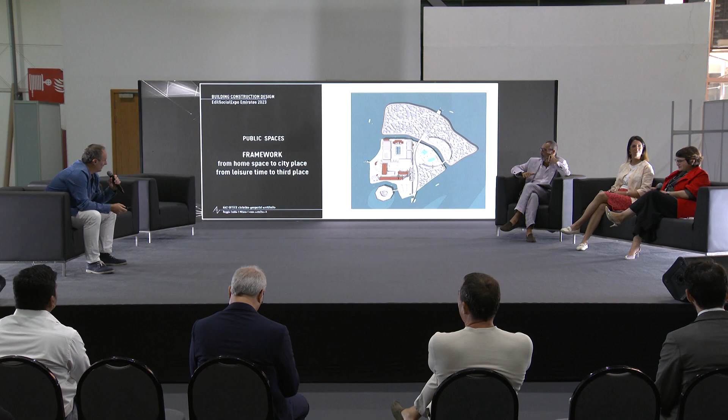I did this contribution in relation to the roundtable related to public space. That is a way in which we are trying to work for many years on public spaces, but even on the home space, as you can see in the title.

Because I think that the time in which we are is really different from the past, and so we have to try, as architects, to define spaces that are related to the time in which we are living. And so if we think about contemporary architecture, what I think is real architecture, we have to imagine built spaces that correspond to existing spaces and their inhabitants. And so we have to imagine the space, as we said yesterday, as a generator of well-being.

In this way, it's obvious that we have to refer to the concept of density, efficiency, and flexibility, because we have to build a sort of framework that can link the spatial to the experiential aspect by using a principle of organization that can be for work, but even for living spaces.

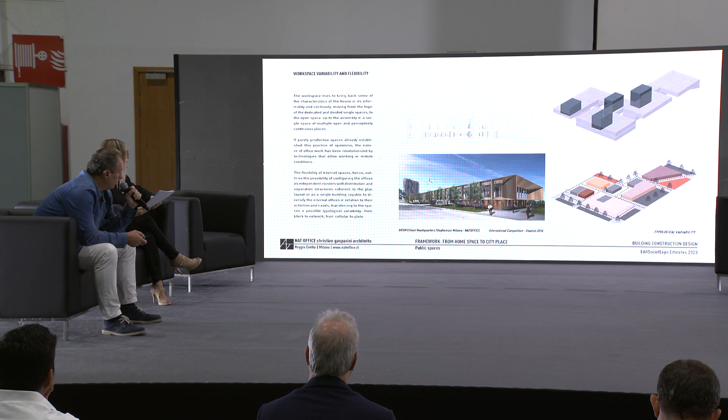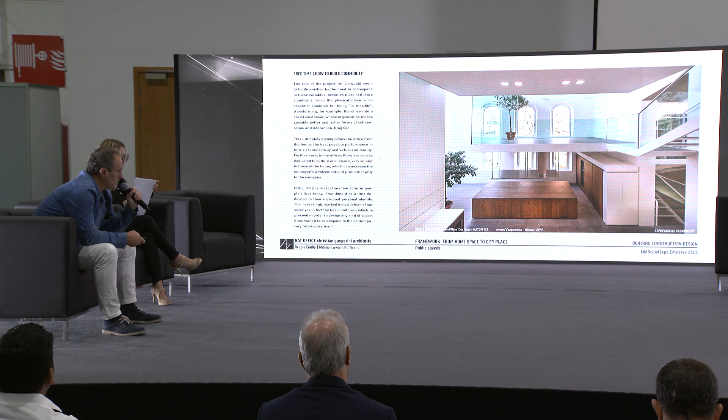This is a project that is interesting for me because we realized it in an old ancient building, and it was awarded best intervention in heritage in Italy in 2018. It's a project in which the client asked us to imagine these spaces for a headquarters that has to become even a home. So we have to imagine that these spaces have to be a home and an office at the same time, only by changing the furniture, only by changing the activity that we put inside these spaces.

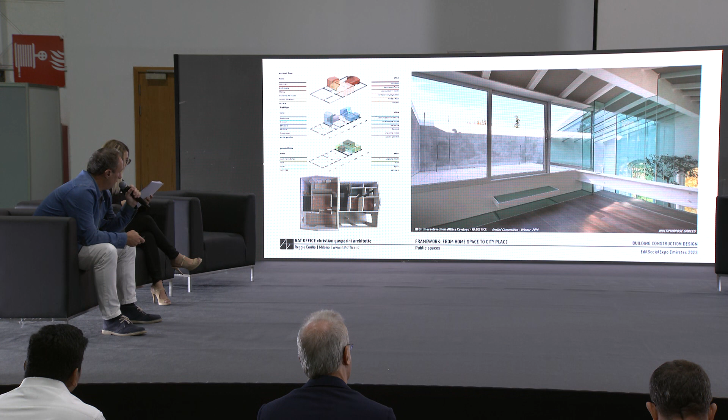For this reason, if architecture wants to be the engine of man's evolution, it has to turn its procedural and compositional gaze to the concept of time. This is really important because our contemporary virtual and technological world has made time syncopated for me—an instantaneous, shortened time which structures fragments and not sequences.

If we imagine when we are here, even while we are here in a physical place, at the same time we have the phone, and we may stay in this same moment connected through the phone with another place in the world or with another friend at home. This is something we have to think about, imagine, and even compose the new spaces around.

This type of society that we have is more related to the individual, the only one man or only one woman. Everyone has a great virtual dimension for his freedom, related to the fact that you have an object that gives you the possibility to connect at every moment. So no one can control you, even if you are at the office, at work, or in another place.

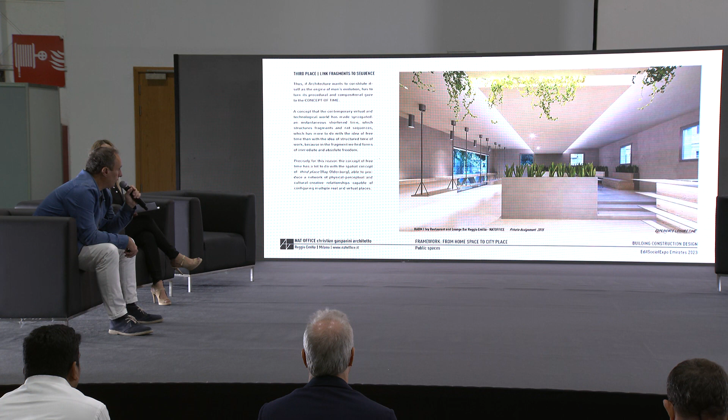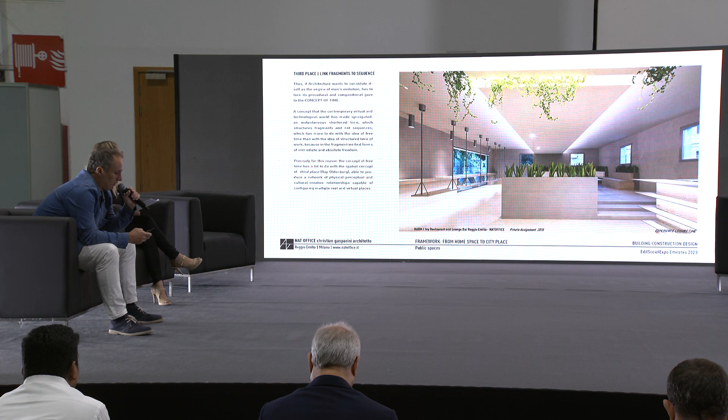This was an intervention we did in Reggio Emilia—Ivy Lounge, a restaurant and lounge bar, where the idea was that all these functions needed to allow people to enter and even to stay freely. We tried to imagine a space in which you can experience leisure time even if you are inside a restaurant or a bar.

This is really important even for the young, because young people now seem to be so adjusted to the sofa, looking at their phone, that they don't want to do anything else. I have two children, so I'm a little worried about that—they're not so interested in going out. We have to find a way to create places where people can go, even to exchange something through the phone, but also because there are other relations that we need to build and imagine.

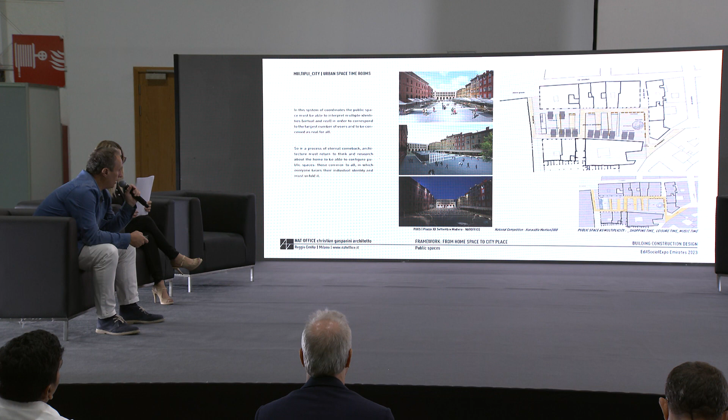These three images, one over the other, show how the public space of the piazza can be configured one way for shopping time, another way for leisure time, and for music time it can be configured with a stage and with people all staying together.

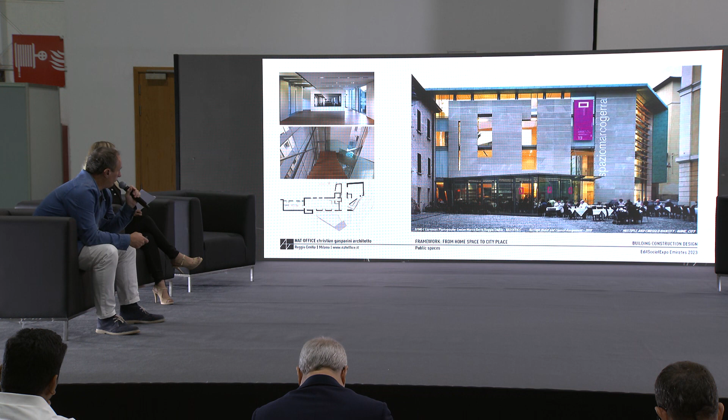This is an intervention we realized in Reggio Emilia—a cultural center, the European Photography Center, where we tried to put this concept into practice. We imagined a link, a connection between the old piazza you see here, with the restaurant and tables outside, and the back of the building, which was related to a piazza that was closed off. With this link, we reopened the passage to the people.

So to finish, we think that the house, in reality, can be a matrix for the public spaces in our era. It isn't possible to configure the city without rethinking the house, because only inside the house, conceived as the minimum living unit, can people unfold their lifetime in physical connection with others—family members, relatives, or friends.

This is a work that we did in the university. I teach at Polytechnic of Milan. This is a thesis of a great and sensitive student, Q.U. Lee, who worked on the island of Poveglia, trying to define some spaces for students.

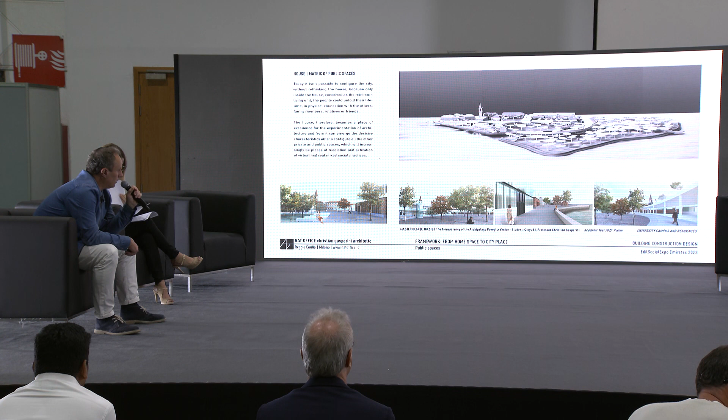These are residences for students that are on the circular shape that you may see in the model. Even in this work, you may see an idea of a public space that can be extended even to the private space, and that can be different in many times and in many ways during the day. That's all.

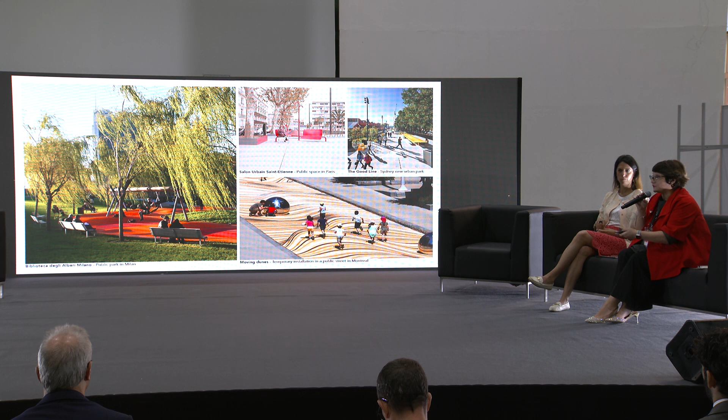Okay, then we come to our projects. Public space was important for all of these projects we are presenting. The first project that I directed was Vigna Clara station in Roma. That is a very difficult station because it's been closed a couple of times in the 1900s, and then it was reopened with this restyling project essentially.

What did we do? Our studio worked with the engineers of the railway stations. We did not touch the existing structure—we tried to use the same structure, the same unity, but refreshing it with new material. The first thing: this project starts with an open space.

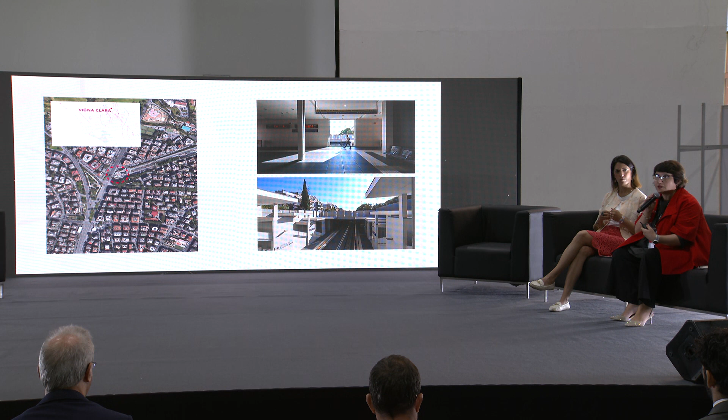This project starts in between what is called the public space. We have to consider that Roma is a very difficult city for space, she does not have a lot of space. So we had to work on the

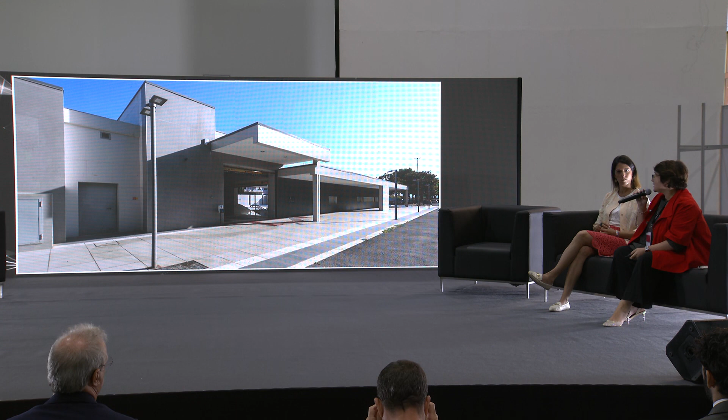thresholds, on the limit of these architecture fields, trying to bring public space directly inside the atrio of the station, so directly inside architecture, so that people could gather in, let's say, a diaphragm space, very small, but they can gather then inside the atrio. The public space in itself is where the train users are waiting for the train, so it becomes even part of this partially. Of course, here we are inside the function.

The other project I present is another station we did that even here, public space and space in between the city is very small, and it's the station of Valle Aurelia. This project I wanted to show because it's very interesting, because this project gave birth to the change of a part of a city. And they did a new public space in front of the railway station, creating a new mall with the center

aura, with this connection between the station, the user, the metro, and the new centro commerciale. We wanted, because there was less space, we wanted to include again public space inside the building itself. So trying to have moments where the people could gather and wait for the infrastructure or the function they had to do. Another point we wanted to bring out is that the facade in itself, we wanted it to

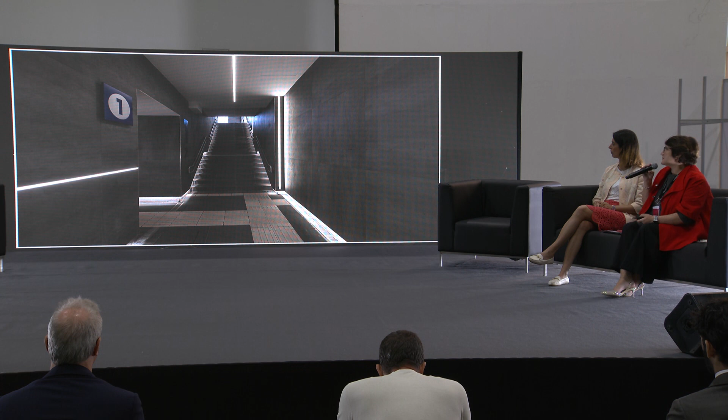So this station is completely open. The atrio is like an unfold, open to the city and open to the function, so to show that there is no limit between man, architecture and the space in between, but we have to believe always more and more that architecture can really even change the way of living and give a good signal of inclusive spaces, so that every moment of the function is essentially a moment to be together.

This is a competition that we had the fortune to participate in for the Roma Termini. So I was thinking, what more than a public space is this competition, where the public space is huge. And it was a very difficult competition because it is a part very important for Roma itself. We participated with West 8 in this, so we had really the fortune to work with a big company and

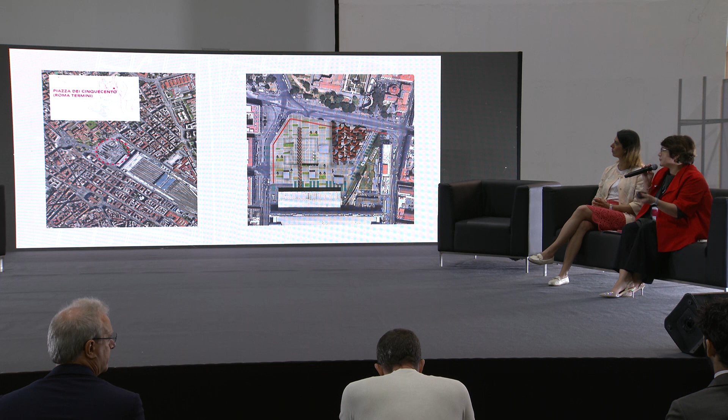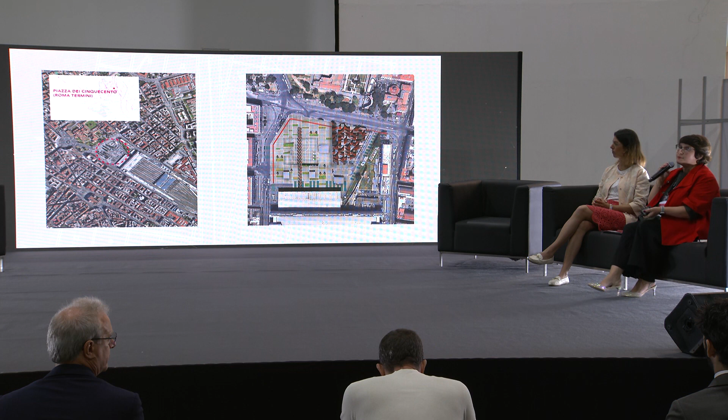understand how the procedures of working with these structures are done. And for example, here, the phenomenon of being together and creating a second space in front of the station is even more important because the dimensions are very large.

And then I close with this project that is essentially another competition that we won, where I think that the public space here, for example, is the park in itself that they asked in the competition to realize, to build and to think. This competition was about a landmark in Salerno, in Italy, a place where there are a lot of, let's say, important communications by the sea. So the threshold is not only the city, but even the link to the sea.

That's an eye contact, very important for people. So this landmark had to generate new perspective for every point of view. So itself, the landscape is itself considered a public space where people could go and join in the park and become an observatory.

And yes, we described a little bit better how we were thinking to bring people on top of Il Colle Bellara, the site, and create a park where to be, to stay, and to have the chance to go on top of the tower and admire the beautiful landscape and surrounding.

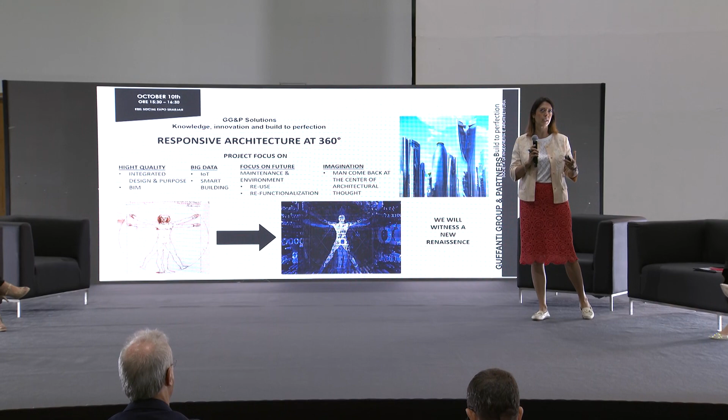We spoke yesterday about responsive architecture. Responsive architecture must be applied, in my opinion, also to public space, because we see how technology goes inside buildings. But technology, we are used to seeing a building that must be responsive to, for example, climate change. So we study a lot how the building must respond to climate change. And public space, what happened? What happened in our public space?

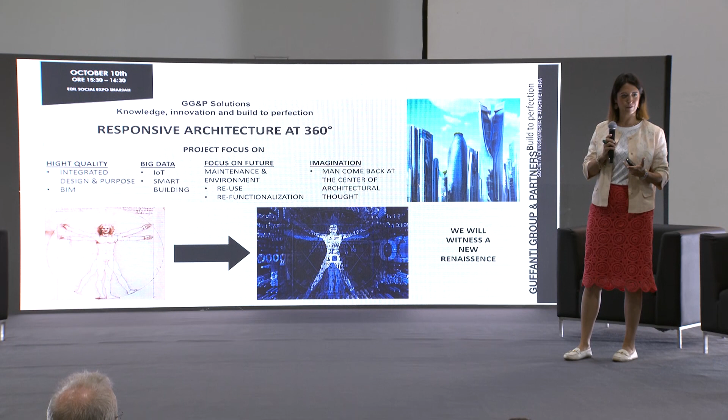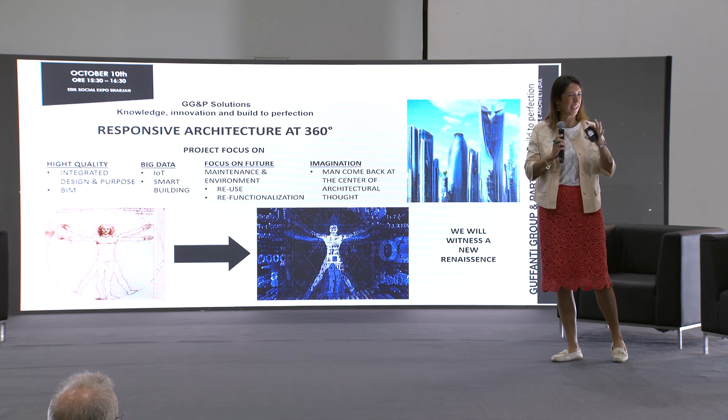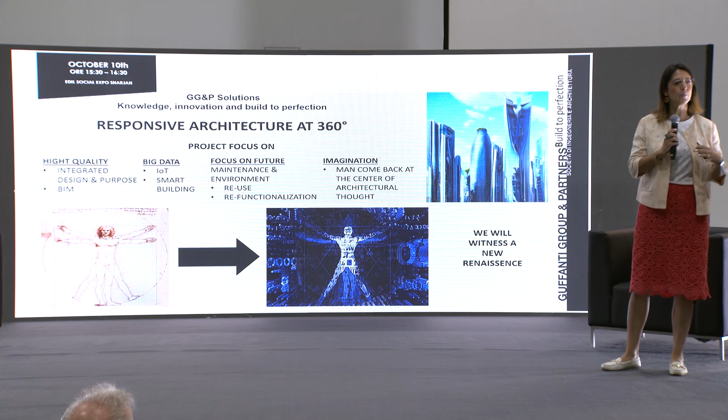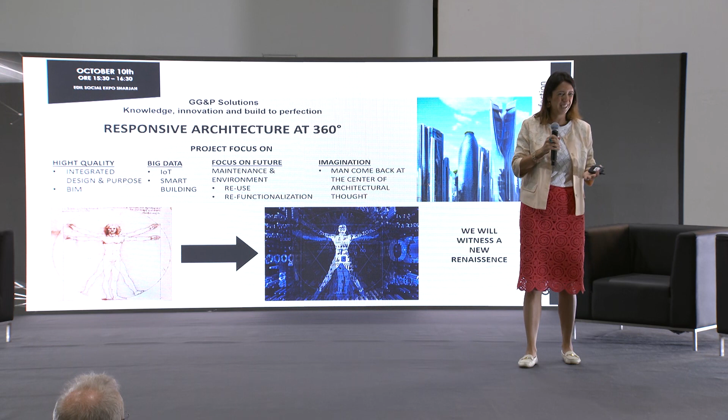I'm a global traveler for leisure, so I like to go around the world, and because I am an architect, I have the eyes to catch the best information in the world. So, for example, public space in the north of Europe, in Greenland, in Ireland, what happens? They included public spaces in buildings, so you can see a lot of street, a lot of commercial area included in the building. So, for example, you have the street inside the building because you can't go out due to the climate. You have temperatures under 0 degrees.

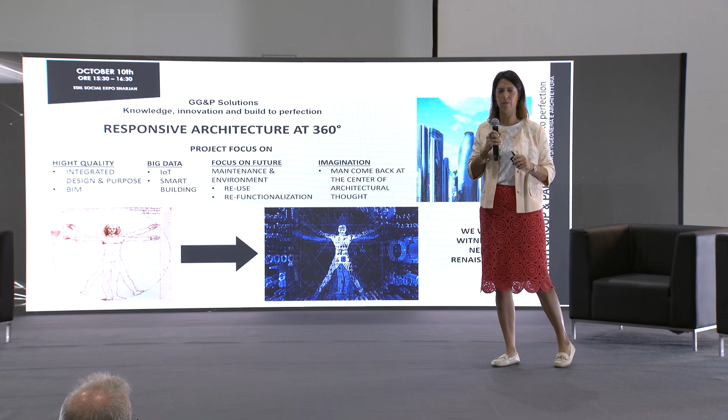And here we are in Sharjah. We come from Italy, a lot of people here. Now in Milan there are 30 degrees, so not quite different from here. But what happened here, for example, is we see that a lot of public space is included in commercial areas, and some buildings live alone along the street. And what can we do?

For example, we can think about climate change also in public space. How can we do it? We can, for example, make them useful for our humankind. So to maintain temperature is not easy, but if you monitor it, in Milan I discovered that we have one of the most extensive monitoring systems for climate. I don't think it's possible, but we have it.

So, for example, if you measure the surface temperature when you have a street, it is about 70 degrees, even if outside it's 40 degrees. The same street with plants, bringing environment inside the public space, the temperature, if you have trees and earth down, is about 40, if outside it's 40. So you can bring down the temperature and control it.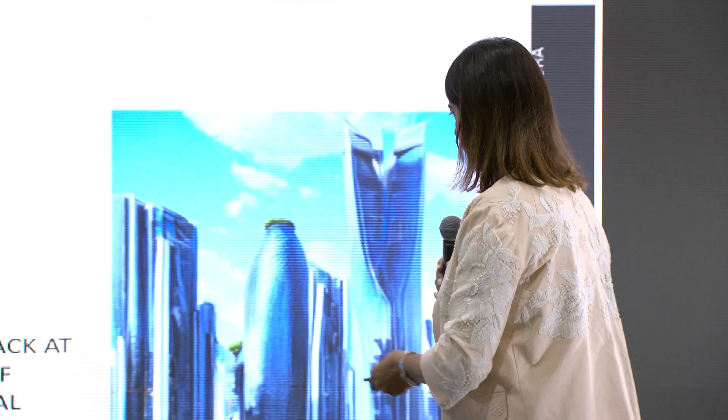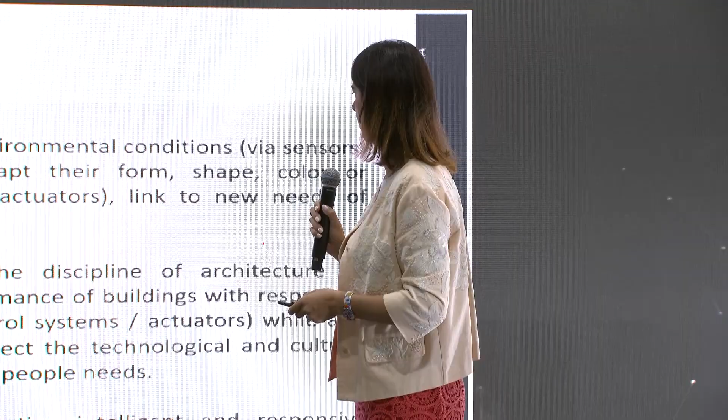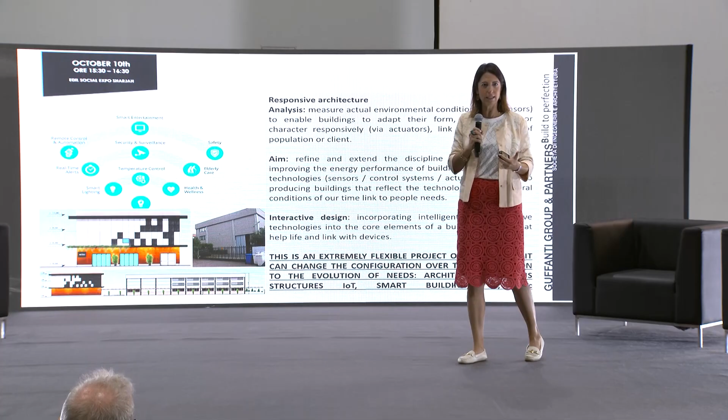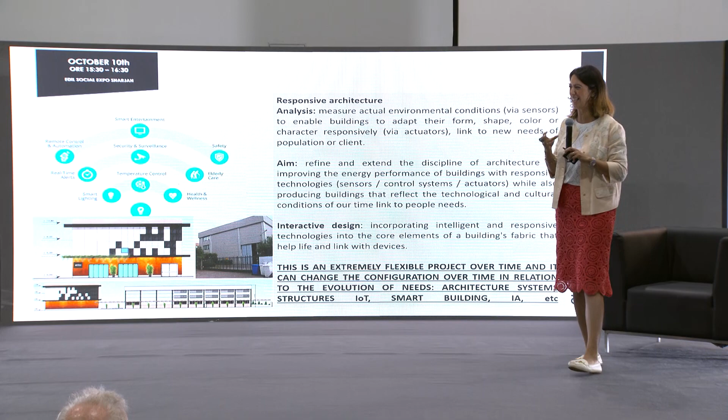So that's a solution we can have. Another thing - why I speak about artificial intelligence also in public space - is because we have to do an integrated design between new buildings but also old buildings. In Italy we are specialized in old buildings, of course, we have a lot, and so we have to do something to renovate them, but include them in the new vision of the city and the new use of it. I appreciate a lot the speech of my colleagues because they gave me some new questions to think about.

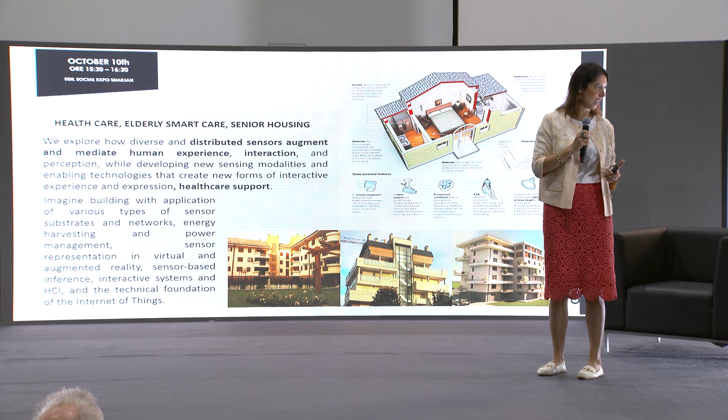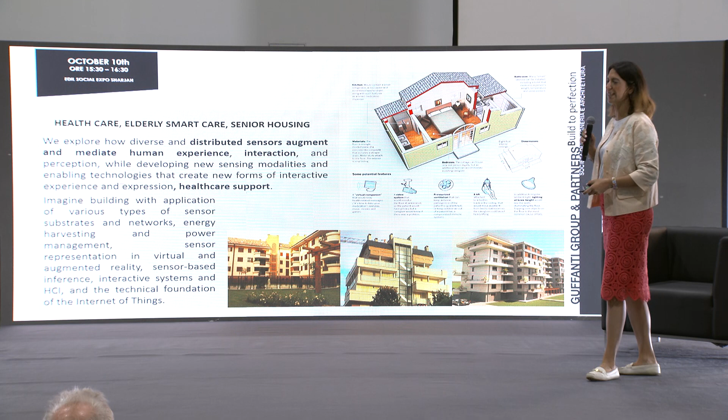For example, it's real that people have habits to go out now, especially after COVID. So maybe we have to think of public space as more safe and with more security inside. I discovered that Milan, with Tel Aviv, is one of the most controlled cities by video cameras. And so the imaging of us, but after that we have a problem of privacy, of course. But to make a city safer, because another problem of public spaces is security. Is the security to use public space always during the day, from child to old man. So, for example, we have in the city now a lot of points where you can help a person that has a cardiac attack.

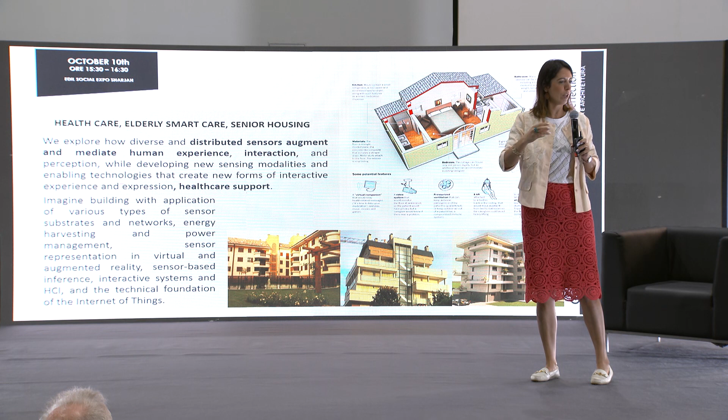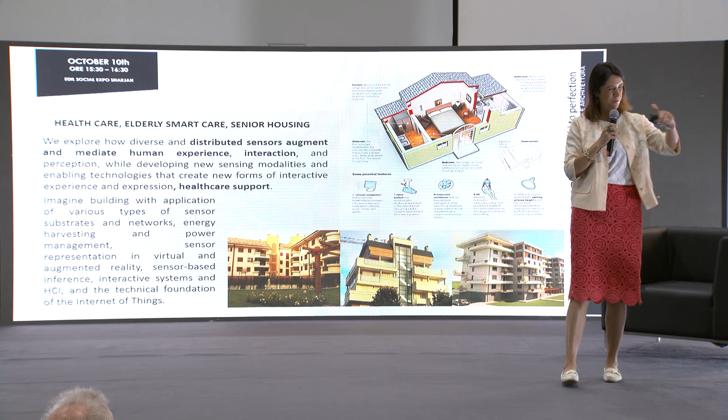You see, we have a lot, so in public space we diffuse it. And it is a new way to think about the problem that people have. Our person ages in time, so we become older in time. So we have to think of public space like a service. So first, climate change in public space. Second, security and safety. People become older and need other ways to use it.

Another way, sorry I forgot it, to include, to govern, to manage the climate change is, for example, to use materials - after me speak another important colleague - use materials, for example, like stone, like ceramic, that change the pollution and CO2 into good air and good oxygen, and reduce solar irradiation and make the temperature colder outside.

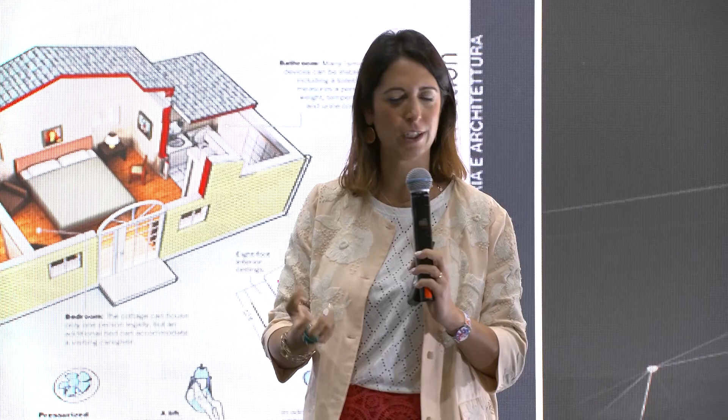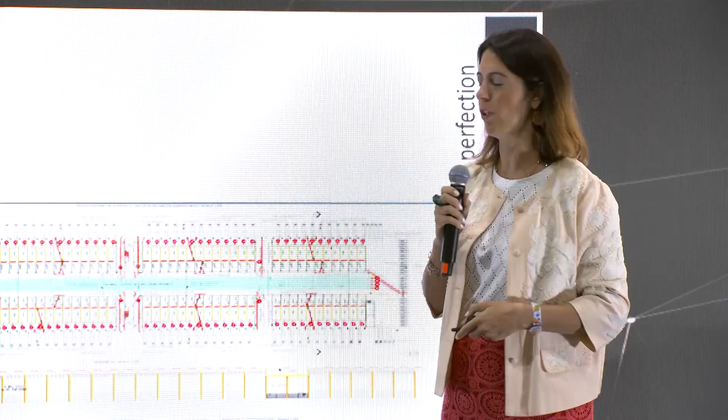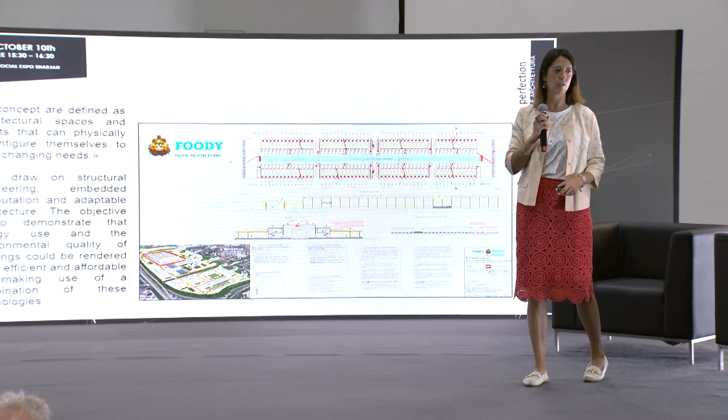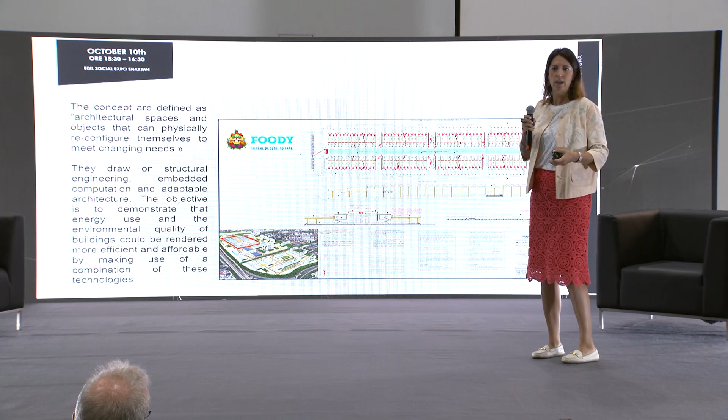Third, and after that a conclusion - it's only some input that I want to give - is to bring some public space inside other buildings. For example, this is the new Foody Market, the biggest market. We made a project of layout and fire engineering, because it is not only the space where people can sell their fruit, vegetables, and so on. It is the biggest in Milan. But it will be open to the city during the weekend, for example, where normal people can come and buy everything.

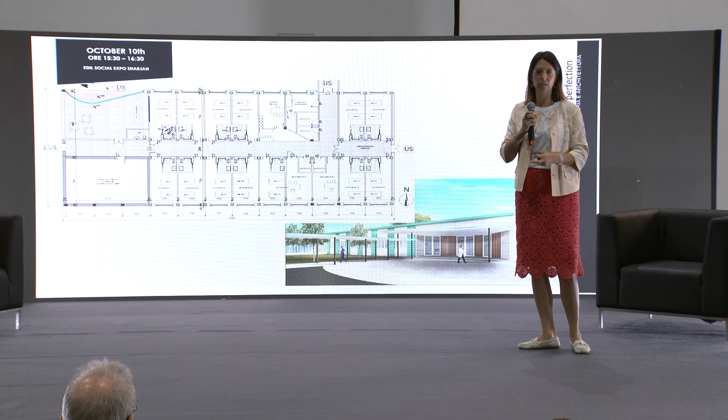This is a hospital. Healthcare will be, I think, a new trend on it, because there will be less need to bring medicine or doctors near the room. We are used to doctors being exactly near the room of people staying in hospital. Maybe they can do the same work in another building with telemedicine. So public space is reduced - sometimes increased and sometimes reduced. It depends.

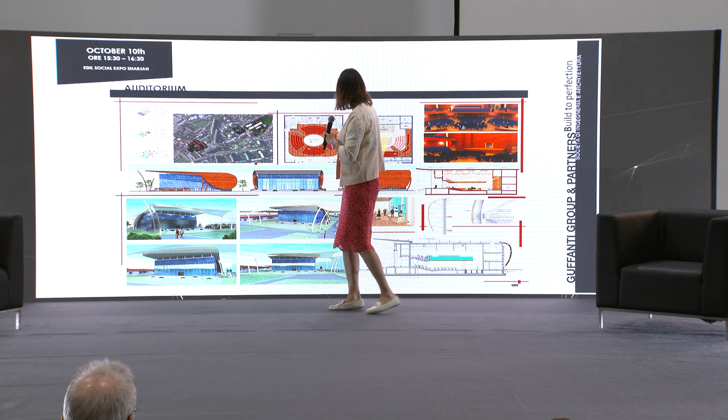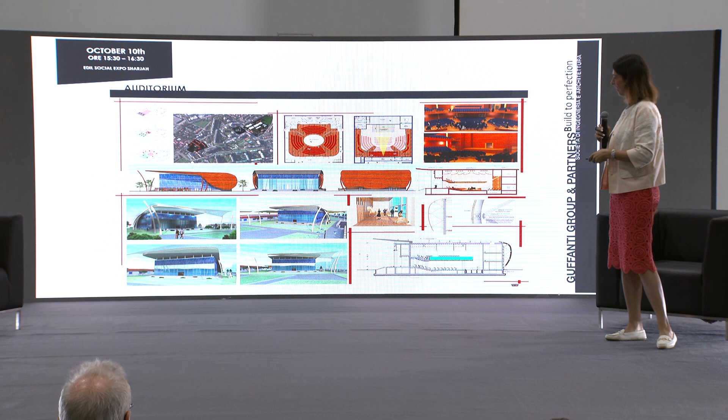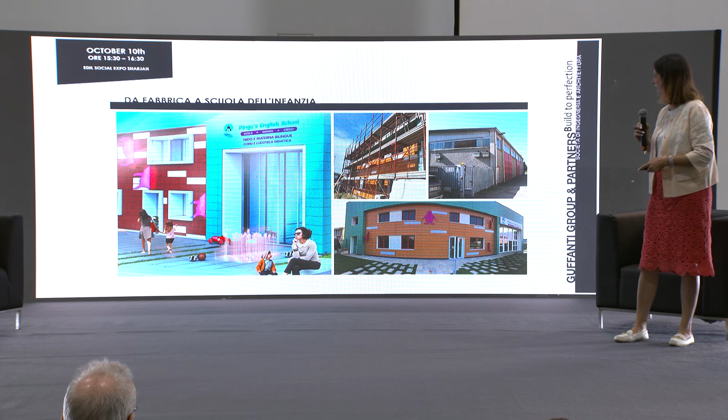And this is the first for accessibility, about 600 places for disability. Here there are some examples, for other kinds of spaces - for children, public spaces for children - to renovation buildings we have, and included public space. So it becomes very important just because public space goes into the building.

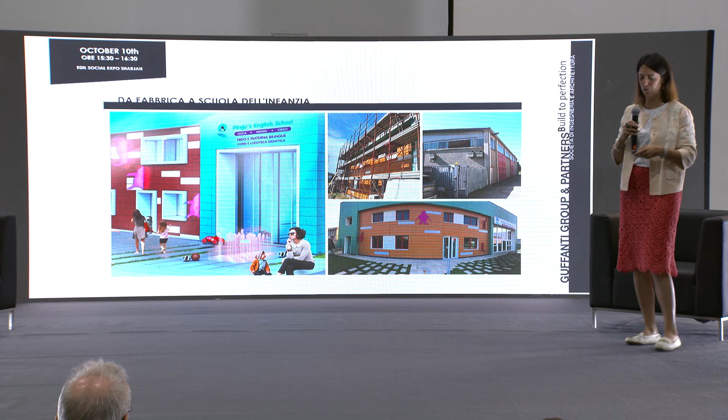Okay, thank you. Thank you, Architect Guffanti.

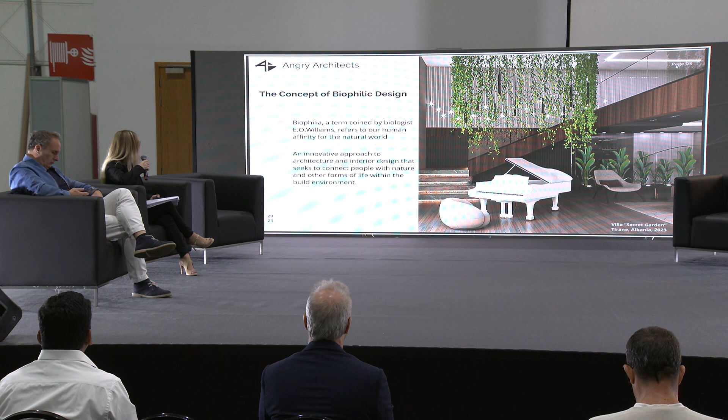What do we mean when we talk about biophilic design? Biophilic design is the connection that humans seek with nature and the natural world. In our studio, we always love, and in the projects we deliver, we want to represent and make the connection between architecture, interior design, and nature.

This is another project from our studio. It's a villa, also located in Tirana, called the Secret Garden Villa.

About the historical context and the origins, we always see that humans were always connected with nature. In the ancient world, they always respected the natural environment, the animals. And so we always see the results of that.